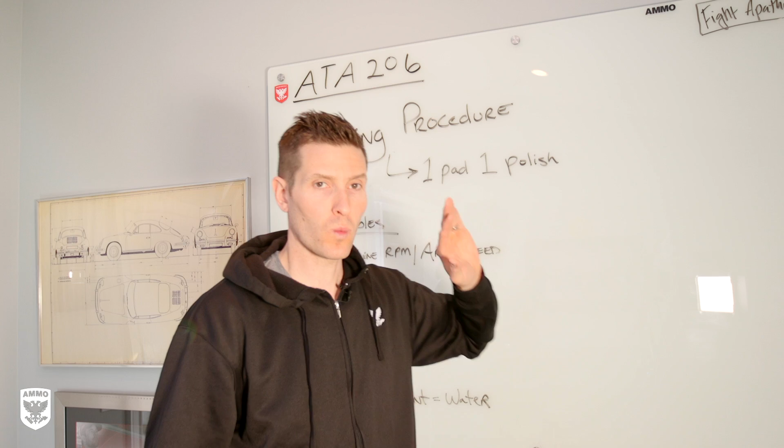Hey guys, for episode 206, we're talking about paint polishing procedure and specifically the one pad, one polish technique. Now, I will say that I'm letting the video go long. This is a longer episode with Kevin because the things he's saying are not only eye-opening, but they really help keep your paint safe, meaning they don't jeopardize the integrity of the clear coat with this technique.

We also use the one pad, one polish in an upcoming episode with Matt Farah on his Countach. So it's not just classroom theory, it's real world. When that video comes out, I'll post a link up here. Let me summarize a little bit of what's going on because I think it's important after all these episodes to bring it home.

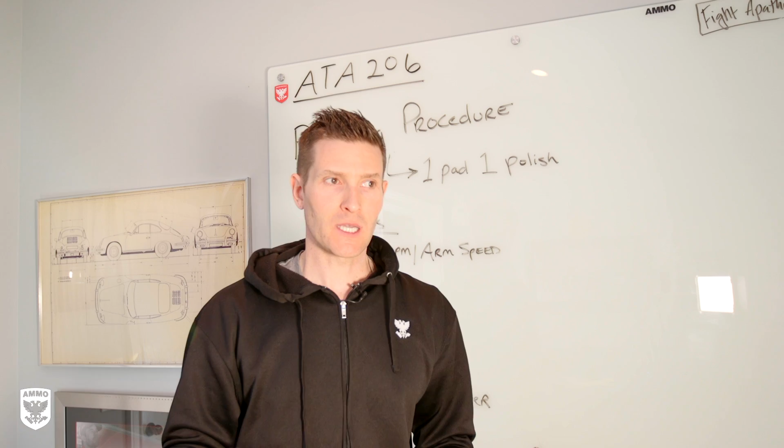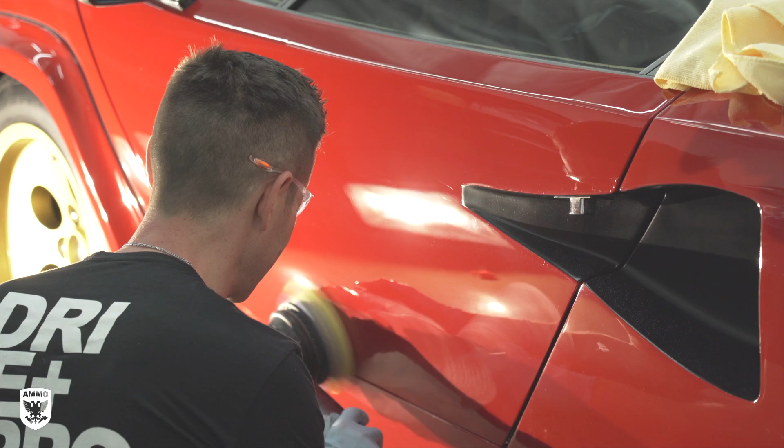When you think of paint polishing, it's kind of like black magic. There's always this weird challenge of figuring out how to make the paint perfect. In this series, we're saying there are ways to make the paint perfect, but not necessarily bang it up and destroy it, hit it with a bazooka. We're focusing more on preservation, meaning what's the visual impact? I want the car to look great, but at the same time, we want to do the least amount of damage to it possible.

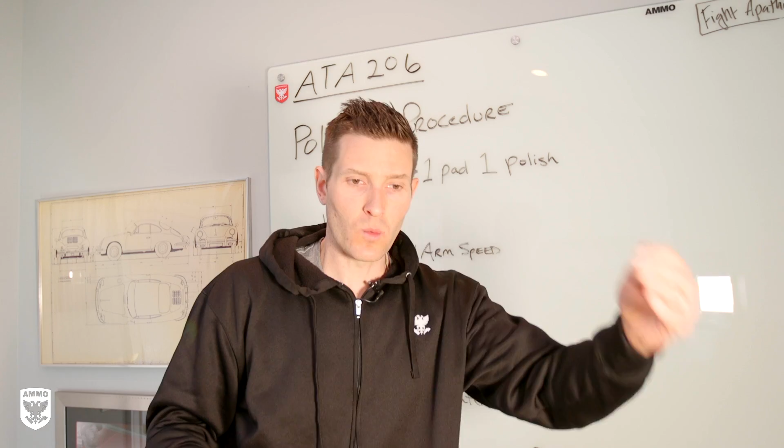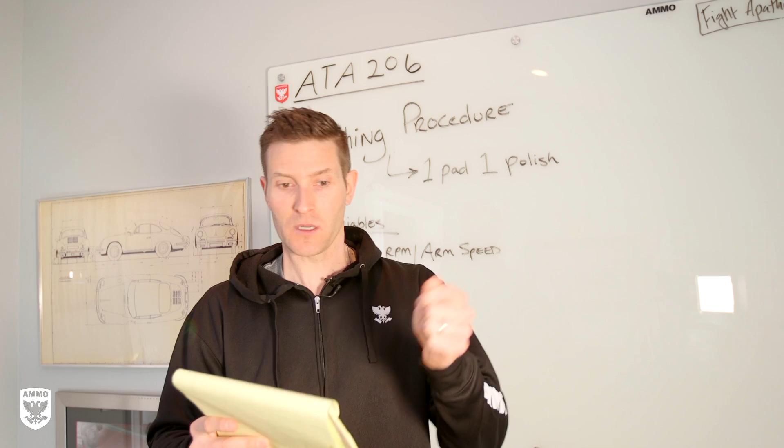Number two is the approach when you're walking up to the car for the first time. What am I going to do to this car? In that process it's fascinating figuring out whether something's going to work or not. Is this liquid working? Oh no, throw that. Is that pad? That pad didn't do exactly what I wanted immediately, throw that away. Is this machine working? In that process of figuring it out, you're grinding down the paint just to figure out how to make it perfect. It doesn't make any sense.

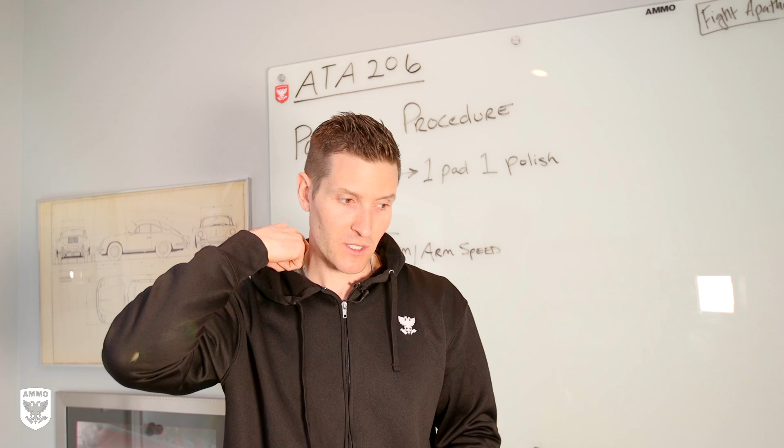Because of all that, we were sitting and I was talking to Kevin, saying how do we get around this? What's the best approach? Because it's sort of like holding water in your hand, it's very hard to hold. There's no 'do it this step and do it that step.' With all that in mind, we came up with this process of the one pad, one polish.

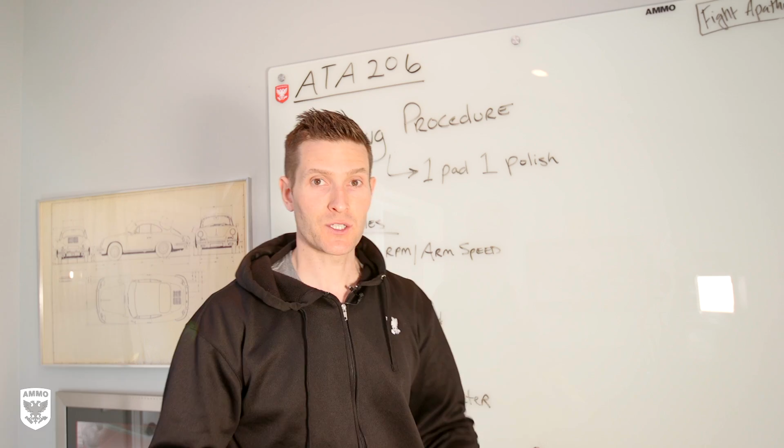In essence, I'm also saying one pass. It's not really, but it just helps to remember. By doing this one pad, one polish, one pass, you really have five variables to deal with instead of hundreds of variables. So pick your favorite pad, whatever it is, pick your favorite polish, fine. Later in the episode you see Kevin puts the pad down, on a particular speed, and we'll talk about that in a minute.

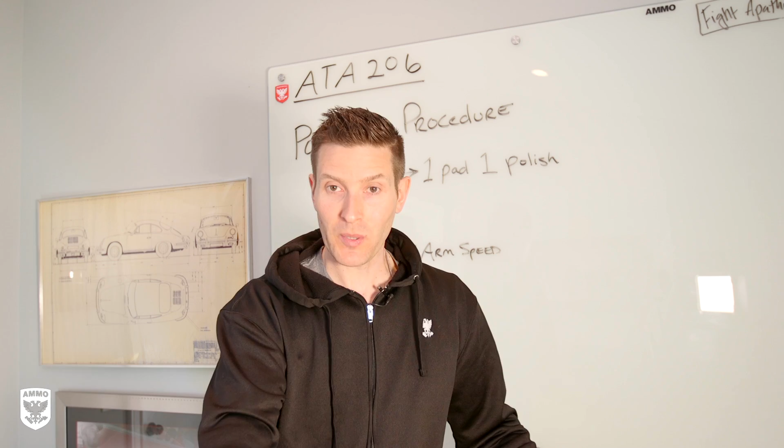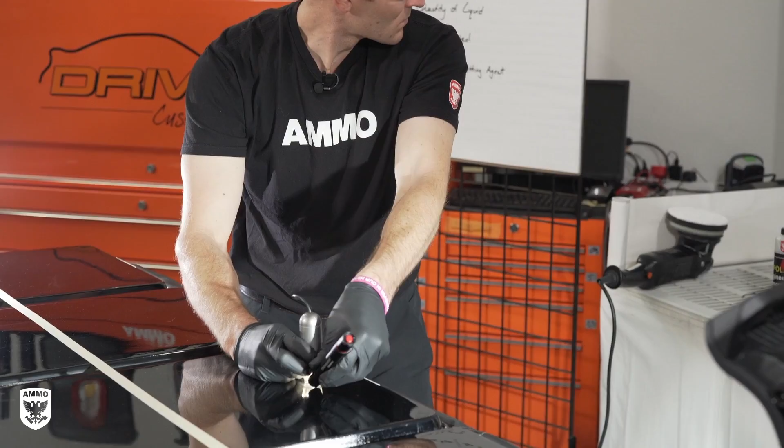Then he goes one pass. When he's done with that pass, I wipe it off, and he goes back and looks at it and says, what's happening in the paint? It's telling me a story, what's going on here? We do four different panels, meaning some have deep scratches, lots of stuff's coming off, or some have soft paint or hard paint or swirls or rotary marks. So we tried to show you a plethora of different examples that you may see in the real world.

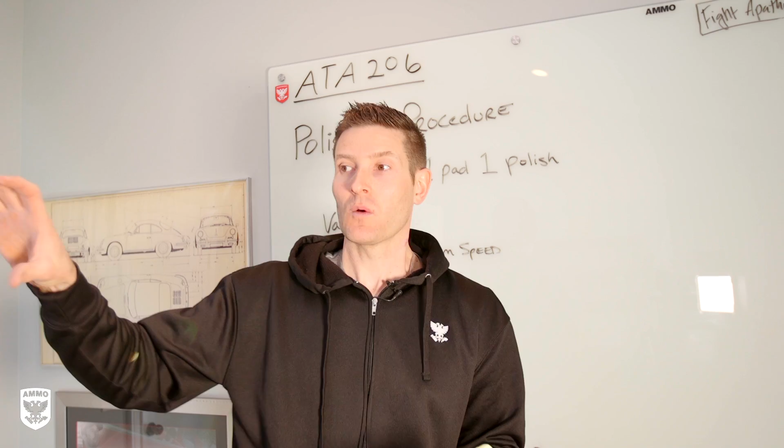But what's the point? We're trying, at the very best we can, to minimize the amount of variables so that you can get a result that you want, but within this preservation mindset. So that's what's really going on in this episode. And the five variables are the machine RPM, the pressure and tilt, quantity of liquid, residue control, and wetting agent.

The first one and two here, you sort of do by default because you have your comfortable way, usually working in between two and three with this much pressure. But you can change those based on if the backing plate is rotating, so you may have to boost it up or lower it down, that kind of thing. And of course, the pressure and tilt, the quantity of liquid. You know what, after that one pass we didn't do a whole lot, so I think we need to do a mow down method in this example, a mow down technique, and just grind everything away before we can get in and take that top layer surface off.

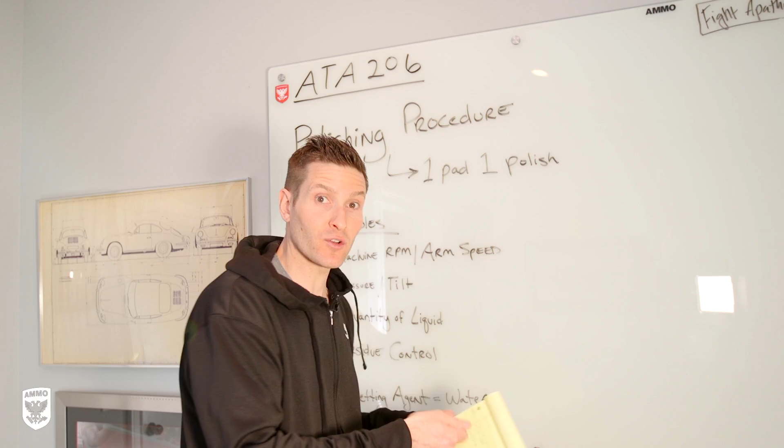Increase the quantity of liquid. Again, residue control—everything's coming in, encompassing your pad. Then, as you'll see in the video, Kevin turns around and blows the pad out after each pass. We're not suggesting doing one pass each time and blowing out after one, though sometimes you may have to on tricky paint.

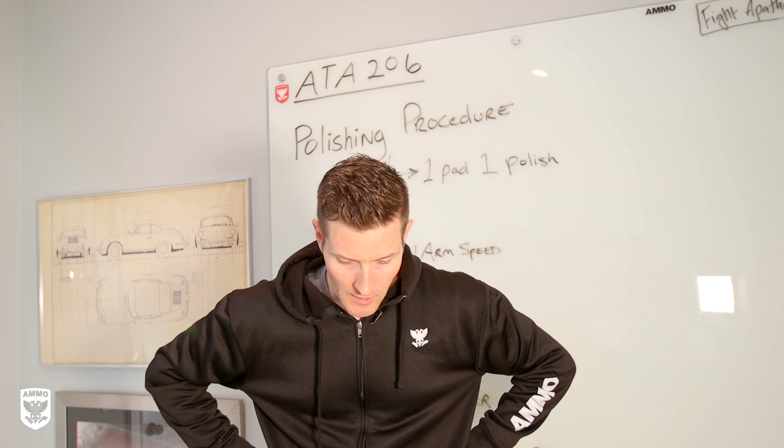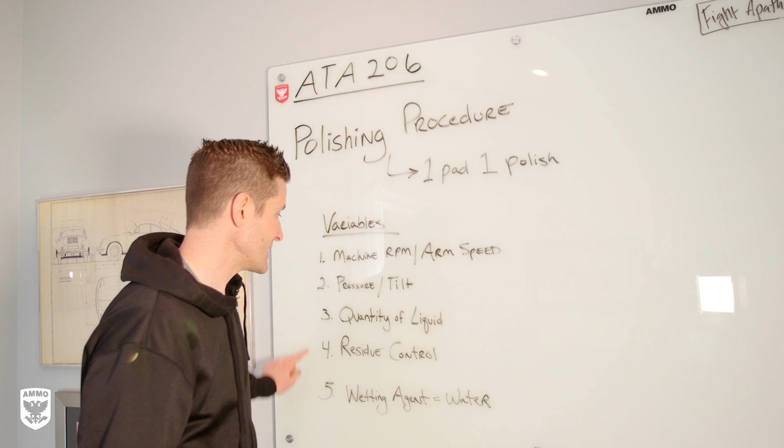The concept is: do one pass, sit back, look at it, and ask did this do something to the paint or not? If it didn't do what you wanted, you're probably going to have to do more passes. If you do get it perfect after one pass, back away—that's the preservation. If it's not right, go in and ask what can I change of these 5 variables that will get me where I want to go?

And you can slowly go through it without chipping away at the paint and throwing away bottles and pads. I hope that concept comes through, because after all these episodes, that is a huge, massive—I don't even want to call it a concept or technique.

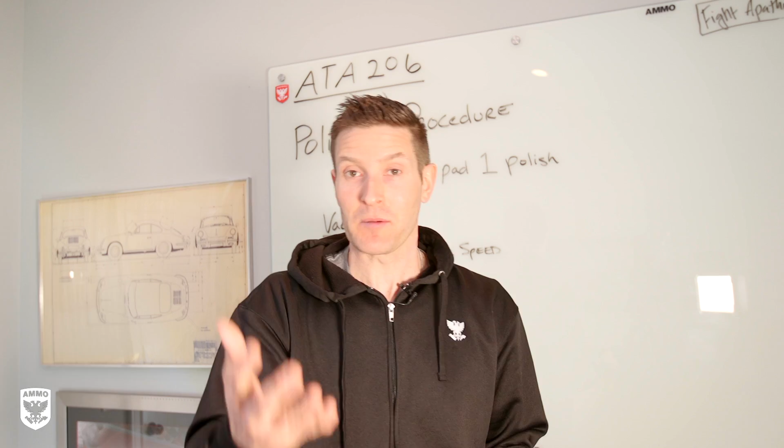It's just so much bigger than that. Even I, on camera, was having aha moments sitting with Kevin. So I'm going to let him talk, because it's a privilege to hear all this—and if it lasts 20 minutes, it is what it is.

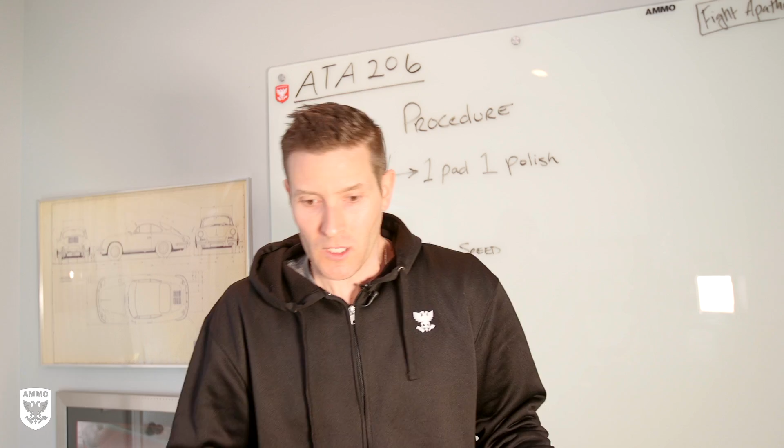But as always guys, thank you so much for watching, and I hope you enjoy this episode. Maybe take some notes, concentrate, go back and watch, or test it yourself, and you'll be like, oh my gosh, I'm not going to have this innate fear when I walk up to a car wondering what am I going to do to make this thing look perfect.

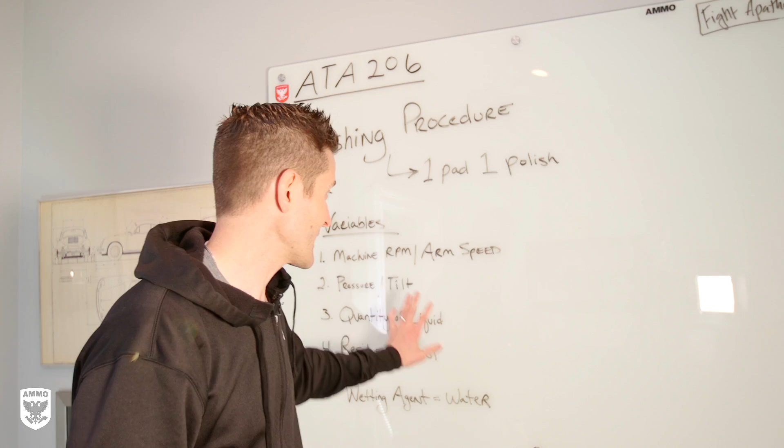You'll have a bit of a roadmap to go through without going completely nuts and pulling your hair out. Just stick to these 5 variables and this technique, and I think you'll have a much better approach and keep the paint safe. So thanks for watching, and I'll see you guys soon.

Episode 206 is finally here: how to remove scratches, the old way of polishing versus the new way. Let's talk about the differences between the two—the way you've done it in the past versus this new, not necessarily more modern, but more efficient and effective way of doing it.

We're very strategic in what we do, so we're simplifying our options. We're using one pad, one liquid, one machine. We're really diagnosing as we work, doing tests with one-way passes—everything's one. So in the past, what were you doing?

We would get some bucket-loaded compound, dab some on there, and start to buff and work it. You could see through it, it would be dusty, there'd be wool everywhere, but you'd work it and maybe just shoot around to find your defects. Not saying that wasn't the right way, but we've become more advanced now.

So we have to be—we're cutting rapidly. If we do too much of that stuff, the paints are thinner now, and we can get into a lot of trouble if we're pointing and shooting, just guessing and not being very specific. So with the technology advances, the product advances, the pad and tool advances, we've narrowed it down.

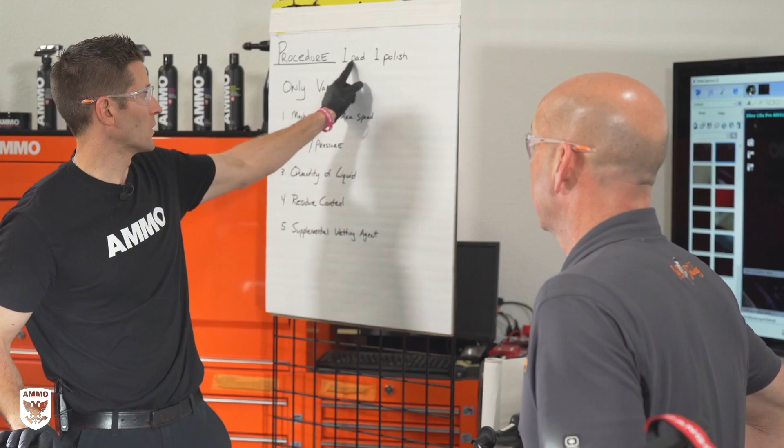So the thing we're going to keep fixed is the procedure: one pad, one polish. That's not going to change. The only variables we'll manipulate are based on these panels we have here, which were from episode 202, where we have the DA haze, rotary swirls, pigtails, and scratches.

Basically all the things you're going to encounter on your paint in normal, everyday life, for varying depths of scratch or quantity. And we can replicate that through these systems right here.

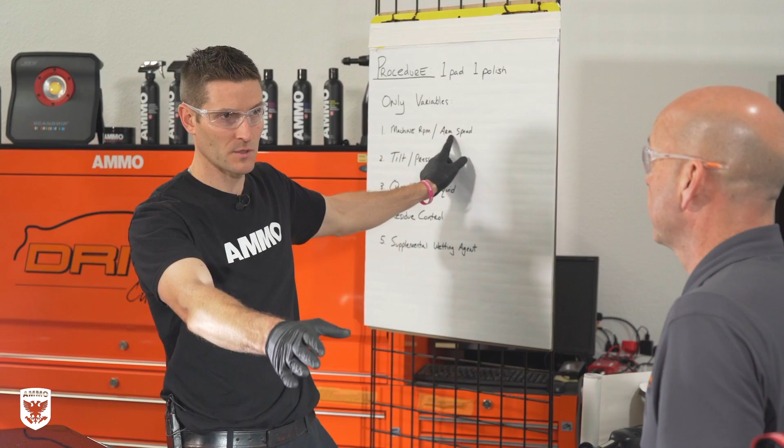If we keep the one pad, one polish mentality, we have 5 variables that we can change, and we do them pretty quick even though there's 5 of them. We have machine RPM, our arm speed—meaning you're going to do your test panel, and as you can see, if the pad isn't rotating, if it's chattering, hopping, or bouncing, you're going to need to change your speed.

A little bit here, a little bit faster, a little bit slower, whatever the pad or the paint is telling you—that's rotary or DA. Either one, they're going to chatter, hop, bounce, or not go smoothly. So you bump up until you get that. Same idea with the arm speed.

If you see some clumping and you say, well, I've got plenty of polish and I know it's clean, but it's clumping, I'm smooth, you can increase your arm speed to help spread that out.

Number 2 would be tilt or pressure of the machine. You can lean down, give it a little more. Mainly if you're on curved panels and such, and you want to plant that pad or get it to conform better, rather than just pressing down and using brute force, sometimes you can just add a little bit of tilt, and that causes the pad to remove part of the pad, and the rest of it fits much better.

In this case, I don't anticipate having to do that too much, because we're on flat panels. We can do such a small amount of motion with this large stroke machine—it really digs every time it orbits.

So the quantity of liquid—we can shock and awe, tons of shock product, massive quantity. That does a couple of things: it increases the quantity of abrasive that we're using and the fluidity.

As we're removing the paint residue, it encompasses the pad and the liquid, it keeps it more suspended and doesn't stop the bog—slow the whole speed of cut down.

And then if you want to refine, you lessen or remove a little bit of that quantity of liquid. We're going to take that same exact pad and we're going to blow it out thoroughly, and that's going to fluff up the strings, take away the clumps and the residue, and basically make that as refined as we can get it to do our final pass. Again, all with one pad and one polish.

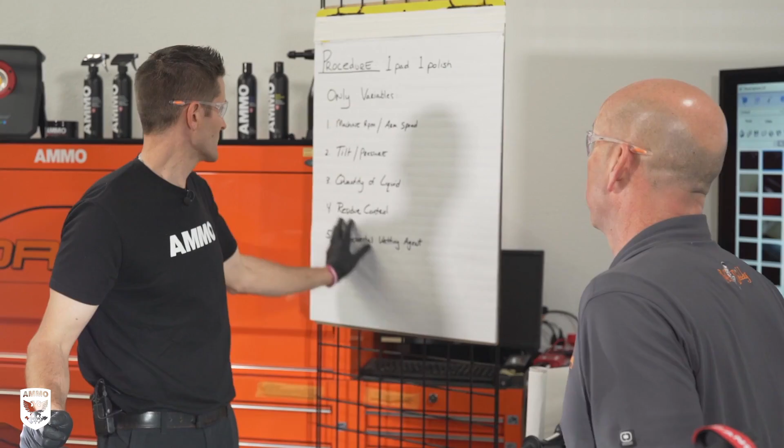So again, these 5 things—I think 3 or 4 of them get done in 2 seconds. And then the rest of it is kind of manipulating those 1 or 2 others. The first 2 are almost automatic—you can feel it, it's by feel, and then you look at it, okay, it looks good, go.

In other words, as we were doing this whole thing over the years, we've sort of whittled it down—one of the episodes had too many, one of the subsections had too many products, too many things, everybody's looking around. If this doesn't work, throw that one out. I mean, even I'm like, I lose my breath and say this is way too much, it's way too confusing. And you're very good at whittling it down to say, well, yeah, we talked about these 5 things, but they all fit into this category.

Before we get into it, let's geek out a little bit. Oh, great.

Here we go, let me get my light. This thing needs a little bit more light, so I'm using a pen here.

This one is the scratches. Varying depths. Look at that bright white thick one, that's very deep. We would probably anticipate we're not going to get that one out, but we'll try to minimize the visual impact.

And then notice the jagged edges. So like when we do that scratch, can I do a scratch right there? Yeah, it's bouncy, it's chattering, hopping. It literally just took pieces out, it wasn't just smooth.

When I do the example of the scratch like this, it's hard because I only have two hands. We're looking at it gouged here, and we're saying, oh, it looks like a V now. But because I only have two hands, it's actually jagged in between, exactly that V. It's like an ice pick. There you go, and that's what I was trying to prove with this, if you look really closely.

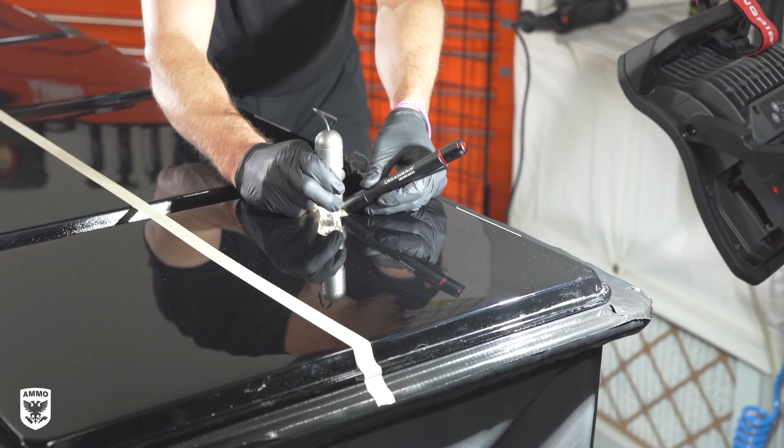So our goal on that scratch is not to eliminate it, because we might go through the clear coat, it's to get rid of that jagged look so that light reflects back more accurately. If we can't see it, for all intents and purposes it's not there, which is the visual impact of it, or minimizing the visual impact. Yeah, and saving the paint. Exactly, doing the right thing by the car.

That's right. All right, so the pigtails, these are kind of fun. Let's find some.

Pigtail is a common thing you'll see, especially if you've had repaint on a panel or something like that. It's common that you'll use a sanding disc to sand the imperfections or smooth out the paint, and sometimes you'll see a consistent pattern that mimics the machine motion. In this case, it's a dual action or random orbital, so lots of little tiny circular scratches. Right, and they're, for the most part, fairly close to the same depth.

There are a couple of them that are exceptionally deep. That would have been where a piece of the paint residue stuck to the disc, and then it got dragged around for a moment, and then broken apart and pulverized. So that one, because there's so much scratching, even though they're not that deep, I anticipate this panel taking quite a bit of time to get that out.

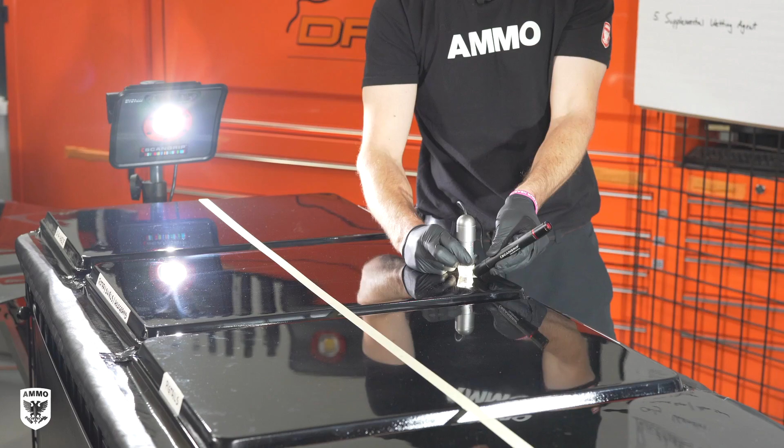Got it. Now we have rotary swirls or holograms over here. Let's see if we can get a good one. Which is caused by either a wool pad or a foam pad, and again it mimics the motion of the machine. With a rotary, if you're sitting flat, you can anticipate that the circle is going to be nice and big. But if you tilt, which we do a lot with a rotary, you're now going to have longer string marks or scratches.

So where are we here in terms of depth? We're still not as bad as the random scratches, but I think that one's going to take a little time too, because there's a large quantity. Look at that, yeah, that's kind of neat. You can see how they actually are in a circular or rotating pattern, but when you just look at it at one point, it looks like they're just straight.

All right, and then we have over here DA haze. That is caused by, and it's very common, you get your random orbital polisher, you do your cut, you do your finish, and sometimes you say, well, all the heavy defects are gone, but it just looks kind of milky. It's because those scratches are in abundance and they're very shallow. So it kind of masks, in this case, the metallic particulate, and doesn't give you the depth of gloss or color. And I don't think that one's going to take too long to get out.

Okay, all right, so now that we've got our little nerd session going, let's talk about the scratches. How are you going to prepare? Tell me about the machine. You have a 21 large stroke machine. I do. You have a microfiber pad on there. That's right. And we're going to use the one polish pad, that was engineered to remove paint slowly.

So with microfiber, we're going to prime it because the strings really have an ability to hold the polish in place. So we're just going to spread it ahead of time, and that's that. We've got that primed or seasoned.

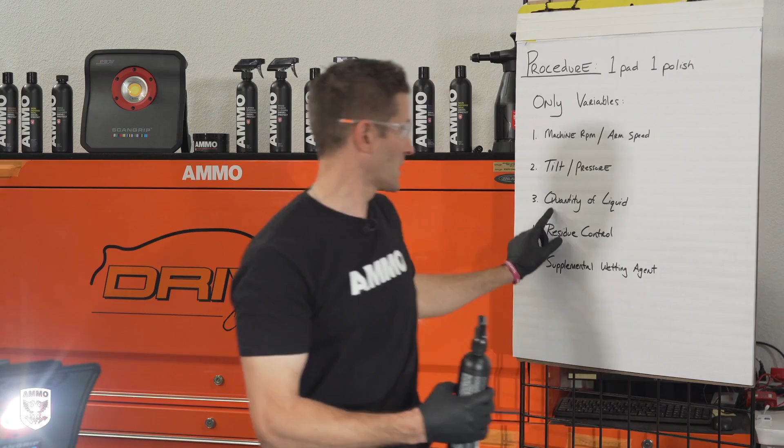So again, he's blowing out the pad, residue control, that's the variable we were talking about. But again, these two get done really fast - then you have the quantity of liquid depending on how bad it is, and of course, residue control, which is blowing out the pad.

So we have a clean pad, now we're going on pigtails. Pigtails, as you mentioned before, a little bit deeper, potentially harder to get out. And keep in mind that if you have heavily oxidized paint, we're not going after oxidation, but if your paint is heavily oxidized, it's going to affect the rate, and we couldn't replicate that here because these are painted panels. We're doing the best we can. We put a strip down the middle because we're going to show you before and afters.

So what speed are you at? 2.5. 2.5.

All right, so with one pass, yeah, there's definitely more work that needs to get done for sure. I anticipated that, but the one pass does look better than the sides over here.

Same pad, prime again. Still plenty of moisture on that pad. Let me see the pad. Yeah, there we go. I don't think we added a couple drops last time, but there's enough in here. One microfiber holds and grabs, so it's hanging on to it.

Next, rotary swirls. Okay, here we go. Again, the pad is rotating.

So I would say there's a significant difference in how bad it was before to after. We probably got 50% of it out on this one, whereas on the pigtails, because it's a deeper scratch, you got like 20% out. There's a lot of scratches or valleys, and we're going to be knocking off the tops of those rapidly, so you can imagine all that paint's loading into our liquid and onto our pad. This one isn't nearly as many scratches, so you won't have that same quantity loading the pad and liquid.

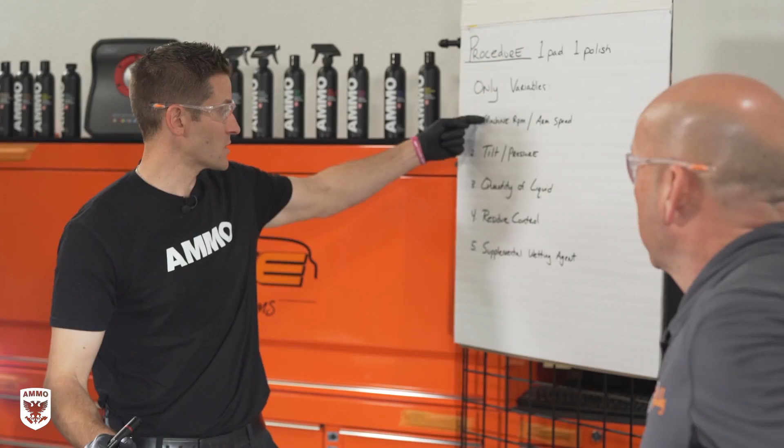To be fair, we do have a polish, so it is doing a little bit of hiding of the defect. You know, we expect that, and we'll check all that. But the moral of the story is you have different test spots, and they all told the detailer something different. And with those things that they've told, 1, 2, 3, 4, different, you change these variables, and then you can attack it in a certain way.

And just to add this in, if you happen to have an entire hood or panel with pigtails, then you're going to do the mow down technique. You're going to put an abundance of liquid, increase the quantity. The smart move is to say, hey, I'm going to take a section and just mow that down for 30 or 60 seconds. I know that I need to do some more passes. Wipe that off, blow your pad out, and just get all of that damage in that general area out of there. Then start doing your work progressively like we've talked about.

So I'm going to pick up my machine. I'm going to use a 5-inch. You're going to use a 6-inch. Okay, we're going to each attack both of these. And once we finish, we'll come back on and we'll chat on camera.

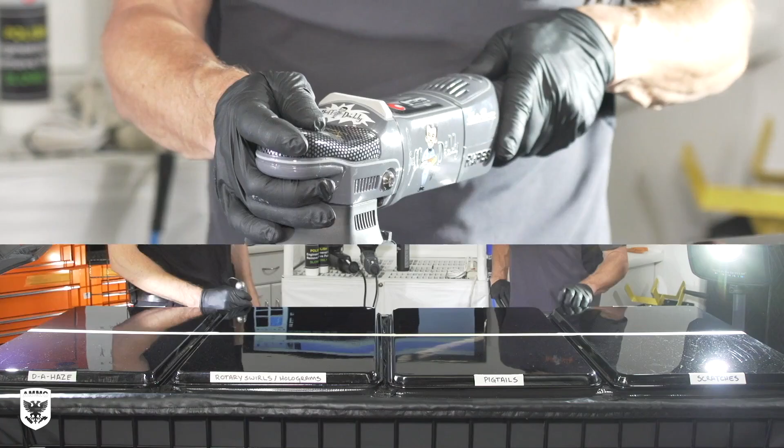Okay, so we completed our 4 panels that basically represent everything you would find on a normal car on the street or something like that, right? The depths, the quantity, all over the map on these. And we did it all again, 1 pad, 1 liquid.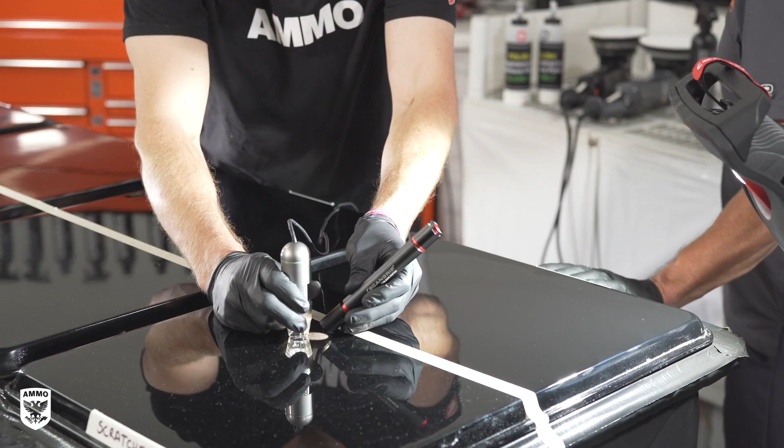All right, so let's take a look at the before of the scratches panel. Random scratches, different depths, different quantities. There we go, see that? Yep, all the scratches. And then afterwards, you're not going to see much because we've managed to get rid of the majority of the defects. That's a little dust right there, those little dots are dust.

All right, so if we go to pigtails, you're going to have a lot more scratches, but not that deep, kind of consistent. And then we go over here, and wow, again that's a big difference. That's dust and little rock chips or whatever, but you're not going to see anything, because that's the point.

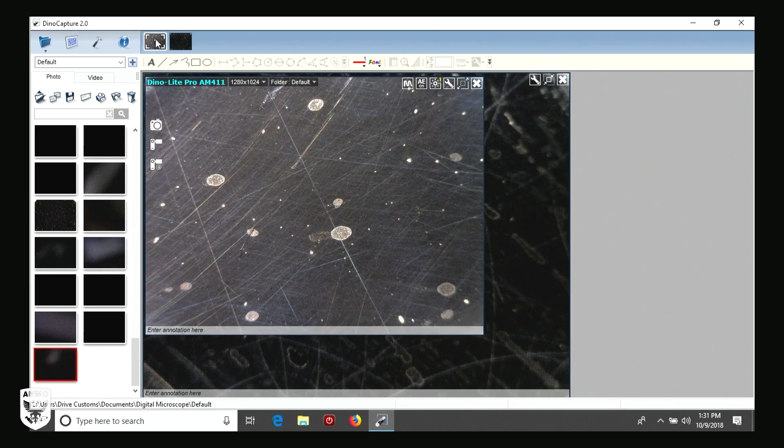And then we have rotary swirls. Yeah, if you move that light around, we can see how they actually do change direction. There you go. And then afterwards, vastly improved. Again, you're not going to see anything, that's the idea.

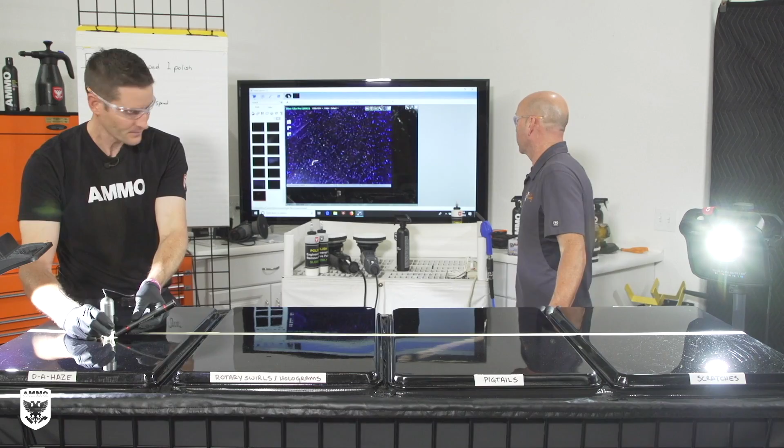And we have DA haze, very common, very fine scratches. Just kind of makes it look milky, not a lot of clarity on the metallic. Watch the metallic, how it's going to make a big difference in how you see that.

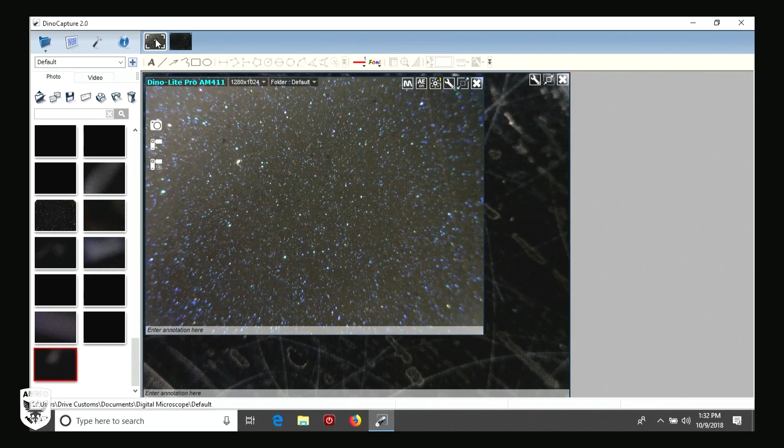There you go, so the metallic comes out looking much, much better. Once in a while I see a little random mark, probably a towel mark or something like that.

So the bottom line is we were doing all these things while keeping something constant, meaning the pad and the polish. Everything we change is on this sheet: arm speed, quantities. The mission was to preserve the paint, not necessarily drop your bags and just go at it and pound, like we've said in other episodes. It's changing the mindset.

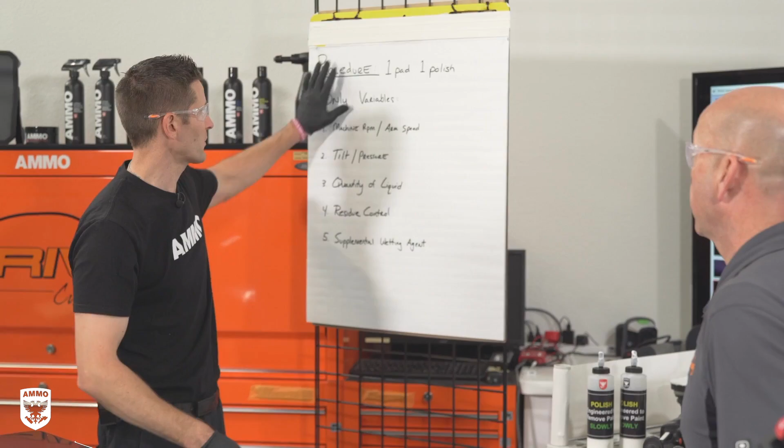So quick recap: with these things staying constant, we have the option to change the variables. Our arm speed changed, and on the machine we turned up the RPMs just to make sure it was slipping. When it wasn't slipping, we thought maybe we could kick it up, or in some cases we kicked it down at the same time.

We have the tilt and the pressure. As we were going on the edge, we put a little more pressure there to make sure we're squeegeeing everything on the edge. Quantity of liquid, absolutely, we did that in this case on the pigtails - initially lots of liquid, and then progressively backed it down by blowing it out, or if you don't have a compressor, just change the pad. Residue control, absolutely, it goes without saying.

Continuously - so when you walk up to a car, aside from the topography of the car, which I really want to focus on, part of me is thinking about how much residue is coming off the car, and at the same time how much your pad is absorbing or retaining - loading or unloading. That percentage means you've got to spray it out more or clean it out more, or you don't need to. Keep that in mind.

And then of course the last one, your tuner, your supplemental wetting agent - you can increase the cut, decrease the cut, kind of play around, mat the fibers down, spread the product.

I think this is a really good example to show a 50-50 shot, to get an idea of how to remove scratches, but more importantly, I think the concept overall for this episode was the old way of polishing - which isn't necessarily wrong, it's just a different way of polishing - long cycling, that kind of thing, versus the new way of polishing where you're minimizing your variables, keeping things constant.